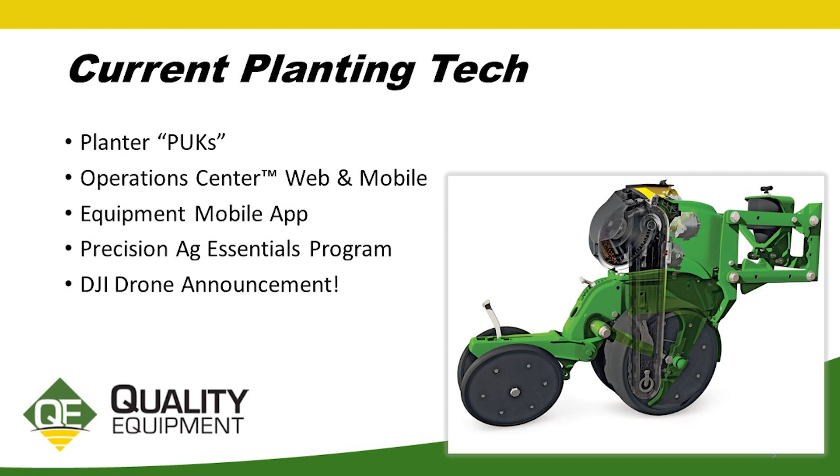First of all, when we talk about planter technology, there's a million ways that you can spend money on a planter. So we got to ask the reason why. Do we need a tax write-off? Do we want to do better growing our crops? And that should be why we're making the investment.

We have here our planting window, uniform emergence, uniform spacing, correct population, and to a lesser degree in soybeans, nutrient placement. But with each of these, we're seeing a bushel bump, from 4 up to 10, just depending on which technology you're going to implement.

And I'm not naive. It's interesting when companies put this out because if you use all their technology, you can make 50 bushels by not even putting the seed in the ground. So all this has to be taken with a grain of salt, but a lot of the technologies stack on each other to increase your productivity.

So the PUKs are a precision upgrade kit, and John Deere, as well as some other manufacturers, are placing a larger emphasis on retrofitting existing machines instead of buying new. And we'll see where that makes some sense here.

But specifically with the planter upgrades, typically these are going to be available for model year 2009 and newer John Deere planters. So there's probably several 1790s represented in the room here, and maybe some DBs. But those are prime candidates for doing precision upgrades.

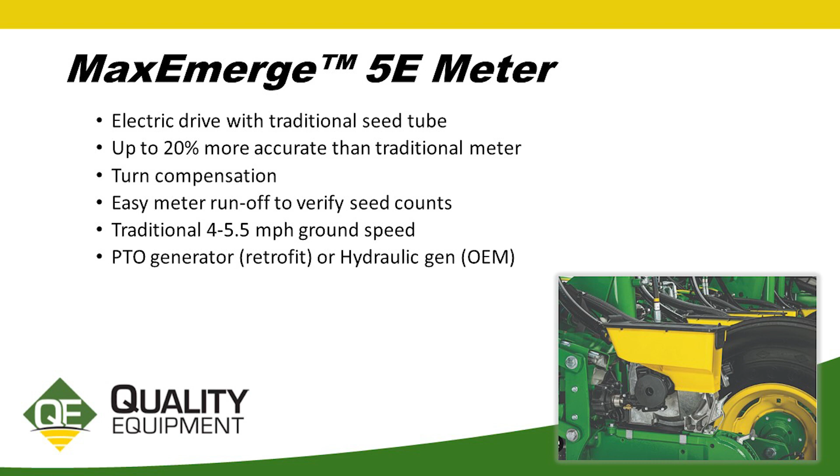And it is designed to run in that traditional mechanical meter speed range, that kind of 4 to 5.5 mile per hour ground speed in the field. And these do require either a PTO generator or hydraulic generator to run those electric meters on the tractor. So you don't necessarily have to have a huge tractor to run hydraulics and so forth. We have some options there to work with some older machines.

The ExactEmerge meter is the top of the line electric meter from Deere. Again, it's electric. There's a brush belt inside. You can kind of see the cutaway here that delivers the seed from the bowl directly to the ground with astonishing accuracy. And we'll have a video here in just a second to see that.

The big show and tell, I guess, with ExactEmerge is the ground speed. So you can run 8 to 10 miles an hour and still have that, I'm going to say, 98 plus seed singulation, which is pretty remarkable. Same thing with turn compensation and power requirements for that row unit.

So this is actual seed drop. It's a static drop to run at 10 miles per hour. So we've got the regular 5E up here, the ExactEmerge. I'm not exactly sure the seeding population of this one. Most of their testing they do on this is around 120,000 seeds on 30-inch rows. So to me it's pretty impressive that it's dropping it out. I'll run it one more time here. Just dropping it out that accurately, running at 10 miles an hour.

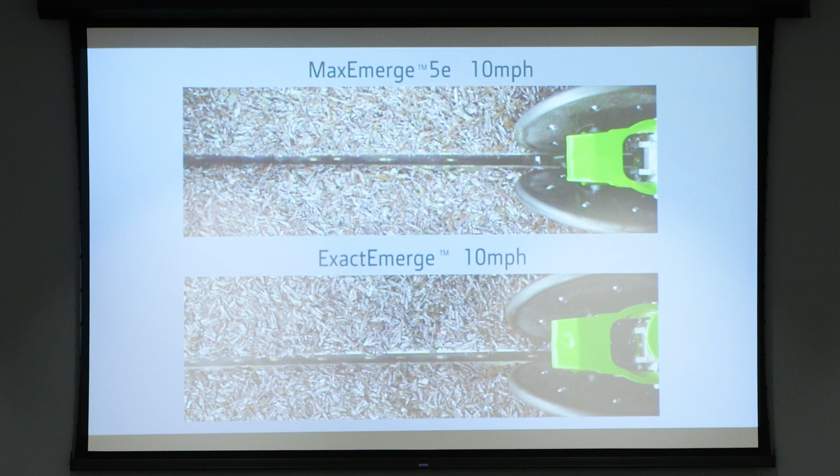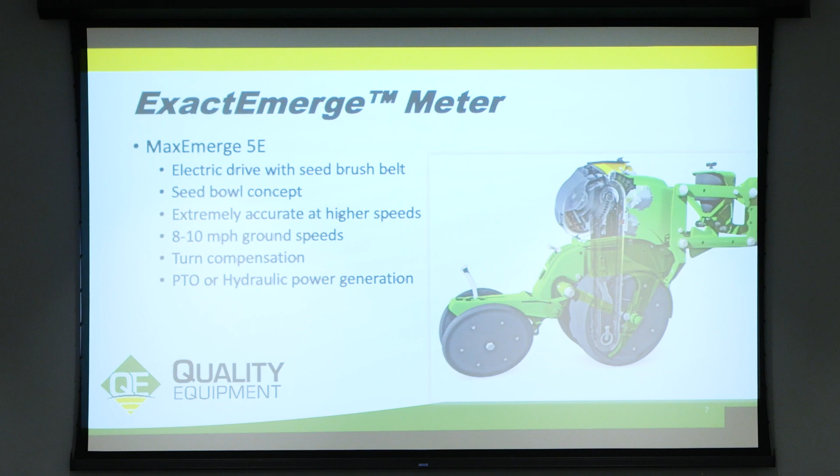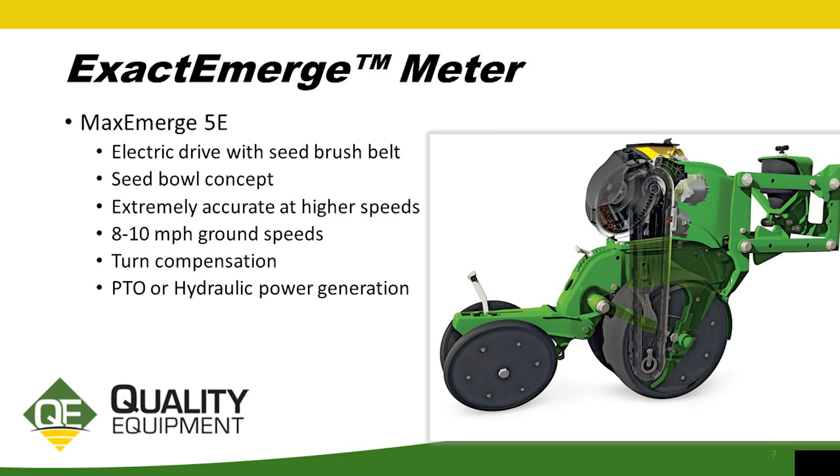Now, we understand in this part of the world there are some fields that we can do 10. There's some that we struggle to do 3 with just the shape and the hilliness of what we have. But one of the other benefits of the ExactEmerge right here is our seed bowl. So it's set on an angle and designed to keep that pool of seed constantly engaged with the brush belt, regardless of our tilt or slope that we're at in the field. A lot of you guys that have the older XP row units, there are places you could get on a hill and that seed pool would fall to the other side and you'd start seeing problems with that. So that's designed to eliminate that issue.

Real quick on some of the other technology, again, these are retrofittable to current planters, would be the individual row hydraulic downforce, which provides instantaneous response to ground conditions, consistent seeding depth, and it adjusts up to 58% faster than the active pneumatic system, which many of you are accustomed to.

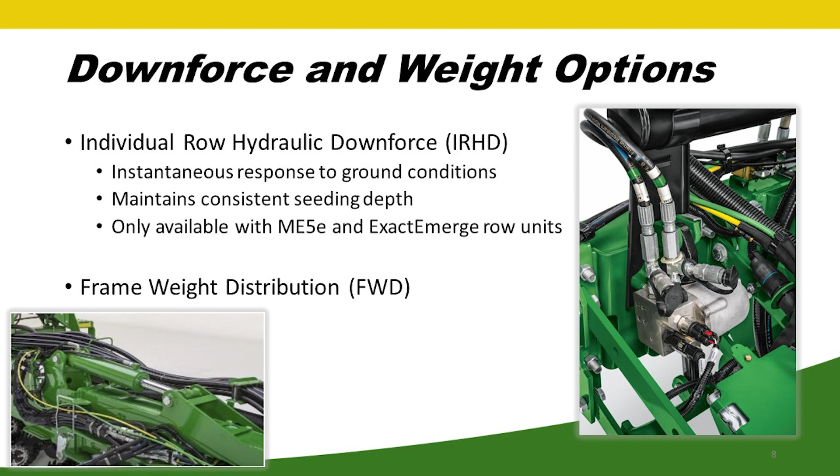And one other option that we have here is a frame weight distribution, which can be a bolt-on retrofit, and it's turned on and off from your display in the cab, but you actually manually set your pressure on the machine itself. It's not really an active system. You just kind of find a happy medium and let it roll.

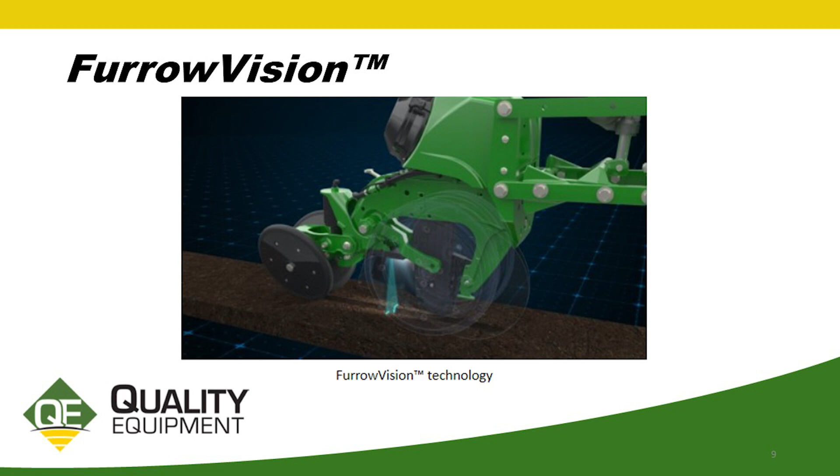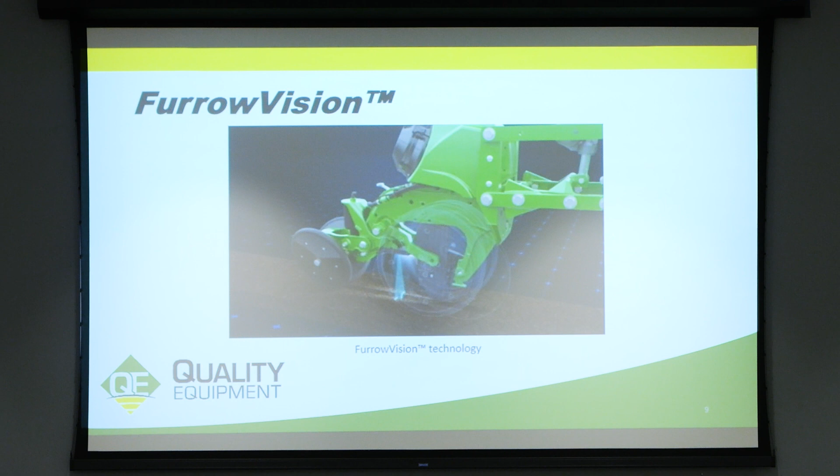So this is FurrowVision, a new technology that's just outside of our reach right now. John Deere announced this last year, and I've been privileged to be in some conversations with Deere about the technology and what they're figuring out what to do with it. But in essence, we have a camera. Like Chris said, there's just going to be more and more cameras. So we have a camera here and a laser module, and it's going to be measuring our trench depth as well as taking a picture in near real time of our seed drop inside that trench.

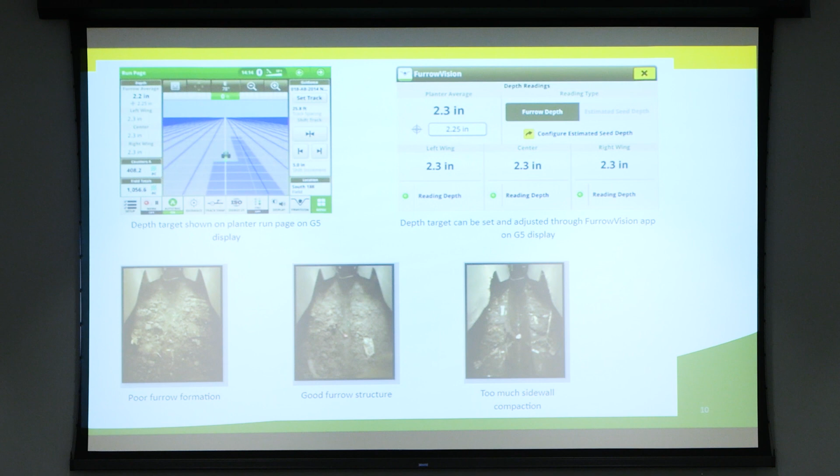So the way that the system is configured currently, there's 3 cameras across the entire planter. And we put in our target depth. And again, I want to stress, you're still setting your depth on your row unit mechanically, but the laser is measuring the side of the trench to the bottom, and that's where we're getting our measurement of our depth there.

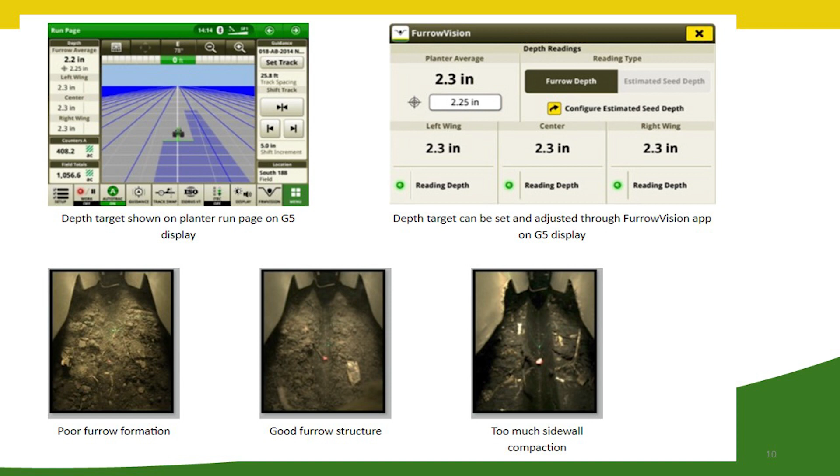So it may be difficult to see back there, but we have a poor furrow, a good furrow, and too much sidewall. It's maybe a little sticky there. But we'll be able to map our seeding depth through our display and Operations Center. So there's some exciting things there, and just to make it easier to do a better job in real time while you're in the field planting.

So getting away from the planter part and more to the data management, I do want to mention Operations Center.

Show of hands or nod of heads, everybody awake? How many out here have an Operations Center? Okay. Who can remember their password to the Operations Center? Yeah. Nobody? I can help you with that if you need help.

But essentially, Operations Center is a free utility from Deere. It's been around for about 10 years. I started using it in 2013 when it was brand new, and I worked for a large grower in the county. And it has just grown and got a lot better over time. So it's an avenue where we can view and monitor our machines, as well as work maps and report totals.

And something that folks used to be very critical of Deere, and I was one of them, is that Deere did not play well with other brands and other apps and so forth. But they have now kind of had a shift in that mentality. And so Operations Center will actually process data from over 30 competitive displays with some of the big names here. Not all, not going back forever, but some of the later model displays from Raven and Trimble and so forth.

You can log in with myjohndeere.com or create an account there. Like I said, it's free. So even if you're not a Deere customer, you run a mixed fleet, there's some benefit here for you guys. So we're going to take a little bit closer look into some of the features within Ops Center, and this is the web version, obviously.

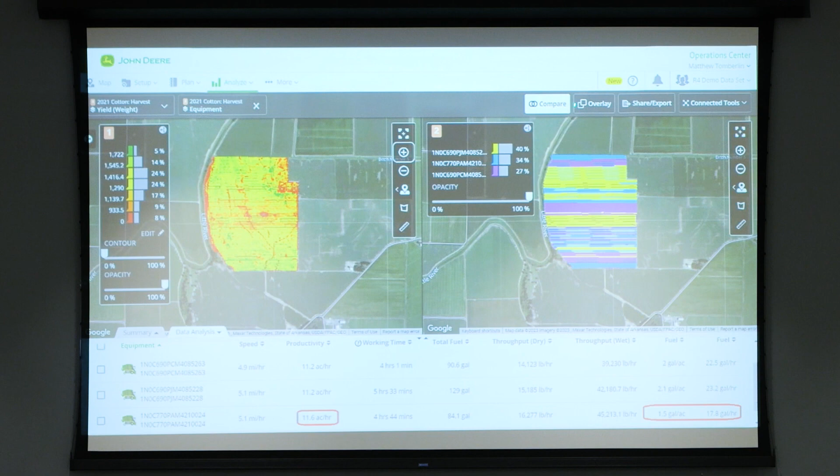We can also use overlay, which is very helpful if you want to put down your planting map with a downforce map or your varieties, and then overlay yield, to see what different practices have the effect on yield. So there's a lot of usability in there. I am hoping, we do expect that more AI, artificial intelligence, will be integrated to help farmers make more decisions instead of just having messy maps on top of each other, to actually extrapolate some information from that.

Moving over to the Setup tab, we can, again, make setup files with our client farms, fields, equipment, products, varieties that we want to get ready, and having that display ready to go. One of the nice features, especially on the chemical side, is the database that's built into Operations Center, where you just keyword search the product that you want to put in and pull it up, and it has the EPA reg number already with it. So that really helps with your record keeping and keeping all that in one place.

And on our Map tab, which is the home page in Ops Center, it defaults to fields, where you can view your field boundaries. And one of the newer features of Ops Center that just came out was rainfall. You can choose rainfall since midnight or over the past 24 hours. You do have to have boundaries drawn around your fields, and you can do that within Ops Center with your mouse. Just point and click and make boundaries, or you can use driven boundaries or as-applied boundaries in Ops Center. So that's a handy tool to get addicted to there. That feature will be coming to the mobile version very soon as well.

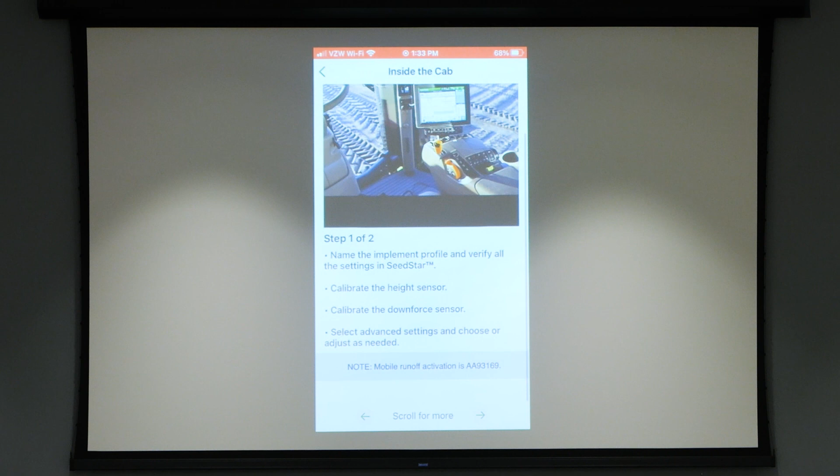So I recorded this yesterday, just on my phone, opened it up, put in a 1795. When you add a new model, it walks you through a wizard, if you will, to select which kind of meter you have and downforce options and so forth, so it's tailored to that specific machine. There we go, okay. So I'm gonna hit checklists. In this instance, I hit inside the cab, and so it's going to give me a checklist of things to check off. You just go page by page, you're done.

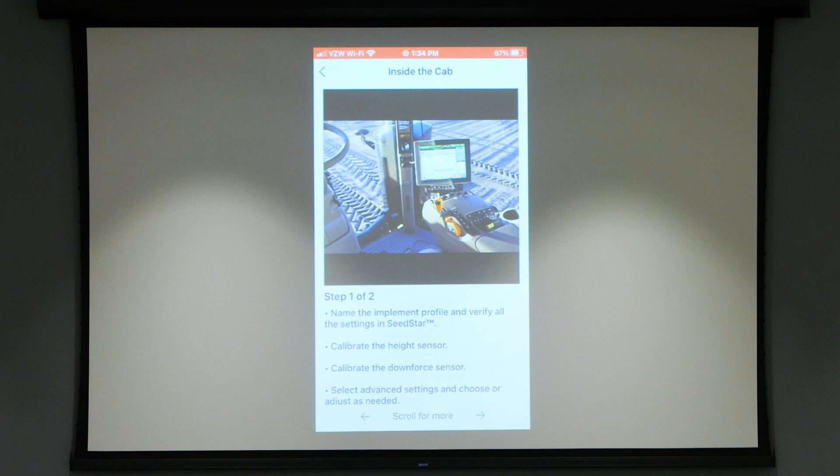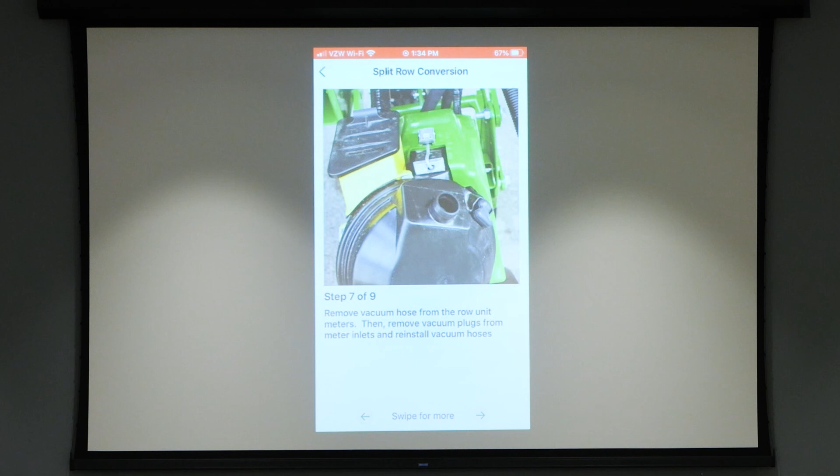I'm going to go outside the cab. It gives me a list of things to check outside on the planter itself. Going back, I'm going to go over to change crop. We get questions about that fairly often, so you're going to pick your row spacing. It's going to tell you what to do on the outside of the machine as far as switching the meter over, any frame adjustments, dropping your lockup rows, removing your plugs from the vacuum, and then it walks on to the actual settings to change in the display. And this will change based on what SeedStar software you told it that you're using.

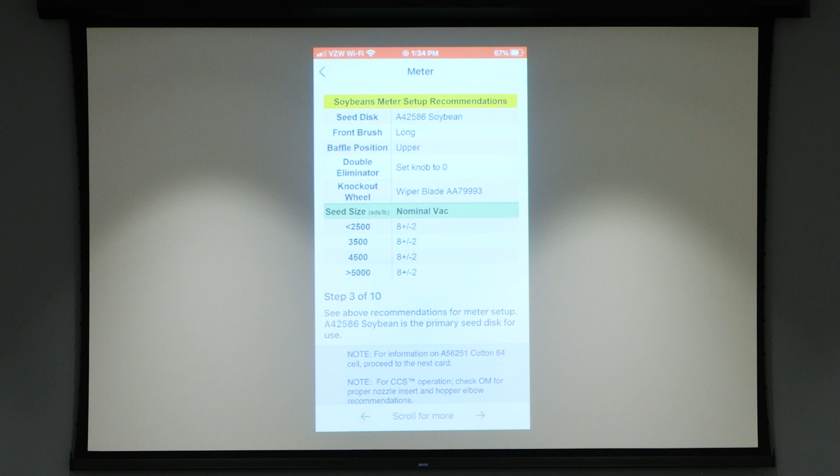So we're going to choose. This is really helpful here to select your crop. It's going to tell you which seed disc to use, and there are about 3 different ones that you can use for soybeans, but it's going to tell you which brushes to put in the meter, where to put your double eliminator.

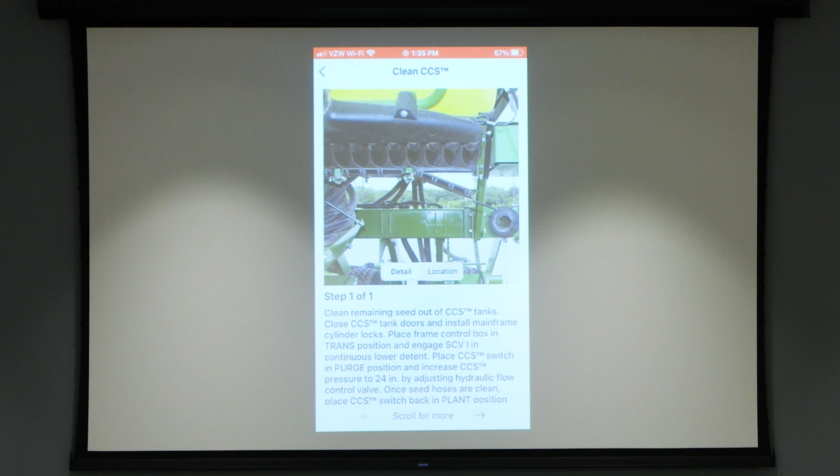I remember the first time, I was very green, new on a farm. They planted corn, and I got this down pat. Let's switch to beans, and we did. And I started planting, and I had a solid dribble of beans behind me in the trench. Like, what's wrong? What happened? Well, I had forgot to put the right brush in to do soybeans. So that was a learning lesson. If I'd had a tool like that at the time, maybe that would have prevented some of that oops.

So there are other machine platforms supported in Equipment Mobile, such as combines. You have your crop settings, changeovers, instructions on how to do a powered shutdown. There's a grain loss calculator within the app for combines. And again, this is not just a green solution. You can use this with any brand of combine. Put in your header width, your crop, how you're spreading it, yield, count the seeds in your square, and hit calculate loss, and it'll tell you your percent loss and your bushels per acre loss.

On the sprayer side, there's tools in here to do a nozzle selector where you put in your parameters. It'll give you a list with part numbers, which nozzles are recommended for your speed and GPA. There's also a tank mix calculator that lets you work backwards into the volume of chemical to put in a tank for a given prescription. So all useful tools, again, not necessarily just for John Deere.

We're going to touch real quick on the displays. So out in the hallway, we've got a G5 Plus. The new series is referred to as G5. The small one's about a 10-inch, and the G5 Plus is about a 13-inch.

You can purchase these with permanent activations. The small one starts around $6,500. They're brighter, faster, more intuitive. Some of the more advanced features, like AutoTrac, turn automation, and implement guidance, are now a license that can be purchased for $750 a year. So it's a good way, if you're thinking about using AutoTrac or turn automation, to get a low cost of entry to try those technologies right on your display.

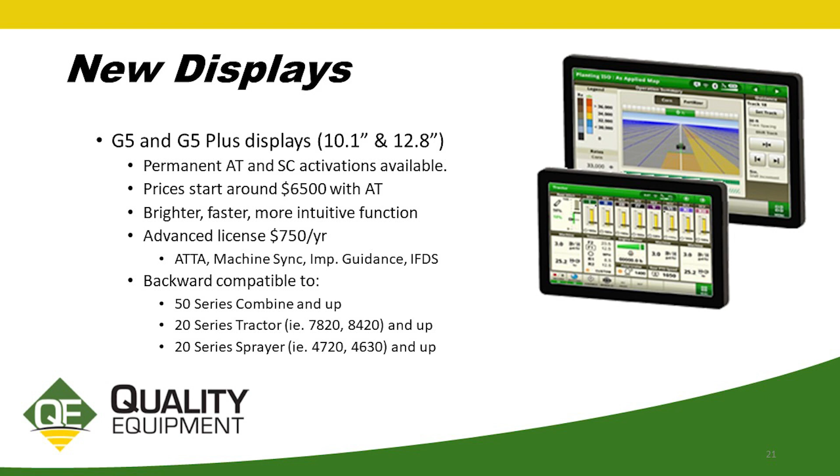These displays are backward compatible to some of the older series machines, 50 series combines, 20 series tractors and sprayers.

Receivers, we've got a 7,000 out there. The 7,500 will be coming out here in a month or two - it's just a chip change inside. The big story with the new 7,000 is that it's available with SF RTK, a 100% satellite RTK solution. I don't think we've got a whole lot of RTK towers here in Union County, not many people using RTK, but satellite RTK eliminates the need for towers, repeaters, and radios. It's 1-inch repeatable accuracy guaranteed over 5 years.

And the receiver itself is a new design. It's rugged, it's shorter, it has field repairable parts. So we anticipate these having a very long lifespan.

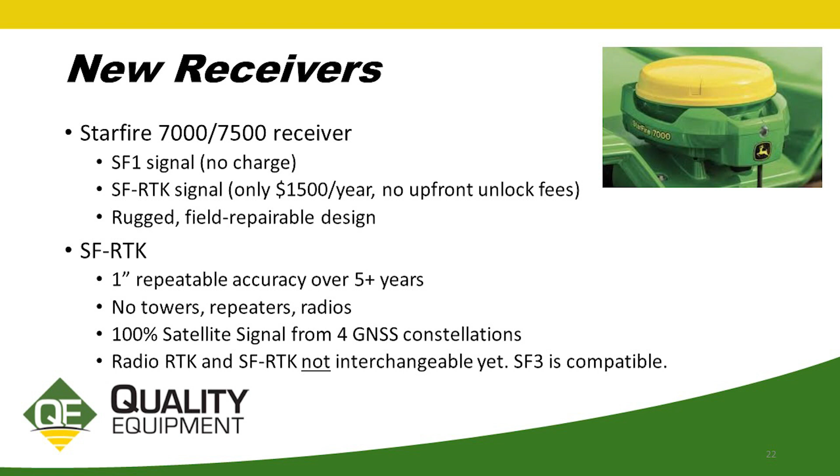The JD Link modems, the M modem - this is kind of the cornerstone of gathering and transmitting your data into Operations Center, which from there you can use it, manipulate it, or share it with other third parties, as well as tracking your machines. The M modem is very simple. It's built with an internal antenna, comes with its own universal harness, and just needs power, switch power, and ground.

We see great opportunity in this to retrofit older tractors, like 8430s and older. I've got a customer who bought a dozen to go in his pickup trucks and grain semis, so he can keep an eye on everything across his operation.

The R modem is a drop-in. That's the one we have on the table out there for most of your R series and S series combines that already have a modem in them that may be a 2G or 3G that's obsolete. The R is just a drop-in, and we can utilize the infrastructure that's already in the machine with that. Typically you're looking at around 500 to 1,000 per machine, parts and labor, to put the modem in, so it's very affordable in our eyes.

The Essentials program is a new program Deere just came out with recently to get the newer technology into the hands of more people, more growers. All this technology in the planter is expensive, and new technology requires newer displays. This package bundles the G5 Plus, a modem, and the receiver for $4,000.